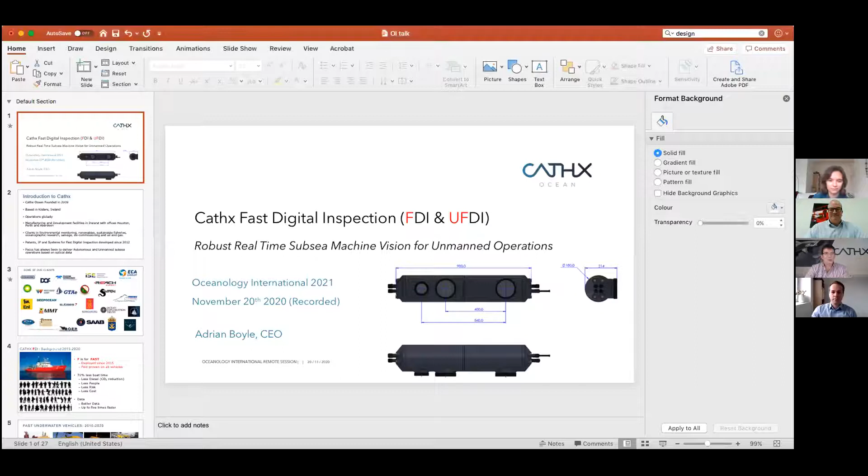Okay, so what I'm going to talk about today is robust real-time subsea machine vision, with a focus on unmanned operations. So I'm also going to start my stopwatch because I've nobody to shout at me.

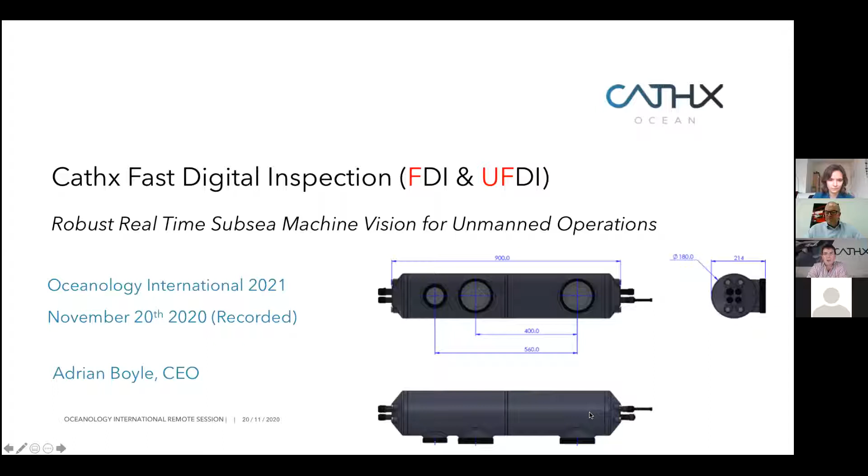In about 20 minutes, I'm hoping, if you're listening to this, that you have a better sense of what Cathx have done in the last 4 years, but more importantly, what we're working on today, in part due to COVID, but also in response to climate change, and what we're planning to release in 2021, particularly for the purpose of deploying what we call fast digital inspection, as I'll refer to what Cathx imaging systems do. I'll explain that, and I'll also explain what we're calling unmanned fast digital inspection, which is the transfer of that technology into the unmanned scenario.

So very briefly, Cathx, we're based in Ireland. We started in 2009. Our operations are global, and essentially we work in Gulf of Mexico, Australia, Aberdeen, and pretty much anywhere there is AUVs or ROVs, we have systems deployed. Manufacturing and development is done in Ireland, and our markets range from oil and gas, defense, oceanographic, and if you go to our website, you'll see many of the different case studies where we cover things like sustainable fisheries, oceanographic research, and particularly impact assessment on the ocean environment.

So there's projects from the Alfred Wegener Institute, you can read a little bit about them. I'm going to focus today on pipelines and a little bit about structures at the end, just to give a sense of what it is that Cathx systems do in the unmanned environment.

If you want to do some reading, we filed a bunch of patents in 2012 around all of the technologies we described. They're in the public domain, and you can read them, but they're probably about 70 pages long. There's 6 of them, but they describe in quite a bit of detail what underlies what I'm talking about today.

Our focus since 2012 - if you read those patents, you'll also realize the language we used then isn't the same language used today. There's different names for things. We've evolved technology, we've evolved the language, but it's in pretty basic terms in terms of augmentation, composite images, 3D models, and point cloud data sets.

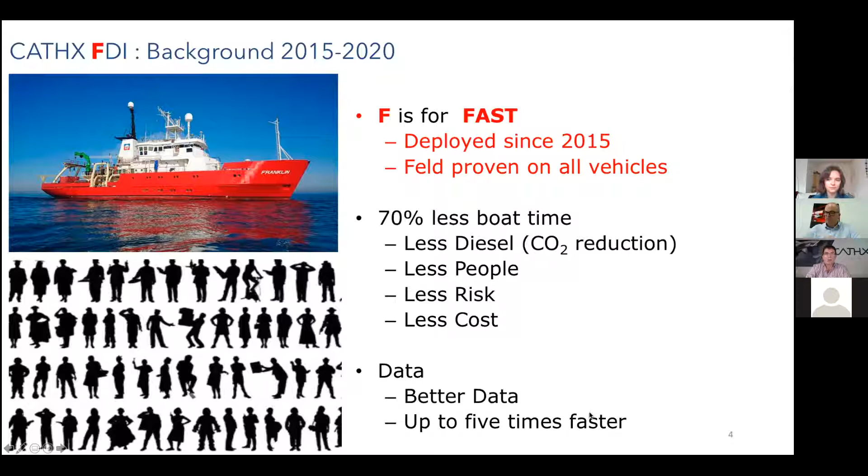Hopefully by the time I've explained what we mean by unmanned FDI, I'll give you a better sense of how we do things and why. Fast digital inspection on its own typically reduces boat time by 70%, between 50% and 70% is typical, and for pipelines it's probably closer to 70%. That means less people on the boat, less people offshore, and much less cost. But from a data point of view, you've now got less time on the boat to process the data, and I'll address that as we go through this presentation.

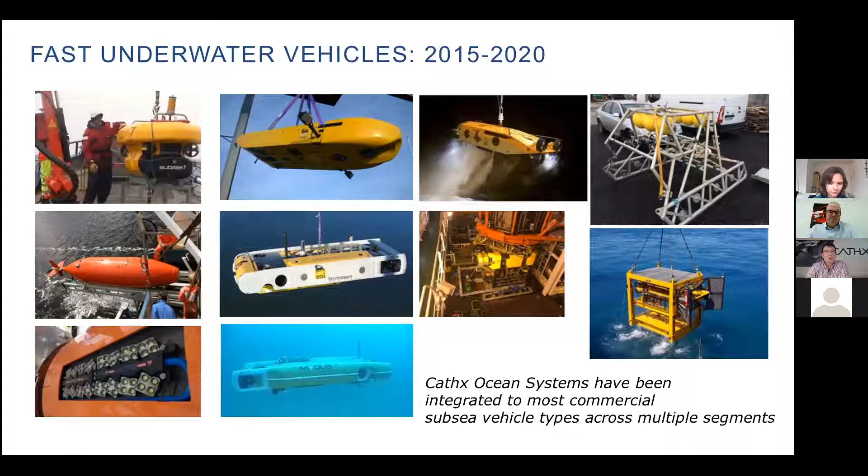These are some of the vehicles on which our systems are integrated, ranging from autonomous vehicles on the left to Sabertooth type vehicles belonging to ENI and Modus. We have a lot of systems on work-class ROVs, fast ROVs like the MMT and Deep Ocean, and on the far right, towed vehicles typically used in fisheries for shrimp counting and sustainable fisheries, counting shrimp and queen scallop nests in the seabed. We've done quite a bit of work with the Fisheries Board in Ireland and Northern Ireland on those areas. But all in all, the idea is to reduce boat time, diesel consumption, and cost.

One small technical detail: when we record data, we timestamp it very precisely. When we take an image, we do so in 1 millisecond, and we timestamp it at the time of acquisition. If you do the maths, operating at 30 images per second means there's 30 milliseconds during which the lights are on. For the other time, we turn on a laser and acquire 3-dimensional laser data. That timestamping and synchronization is critical to unmanned operation, and I'll explain that as we go through the presentation.

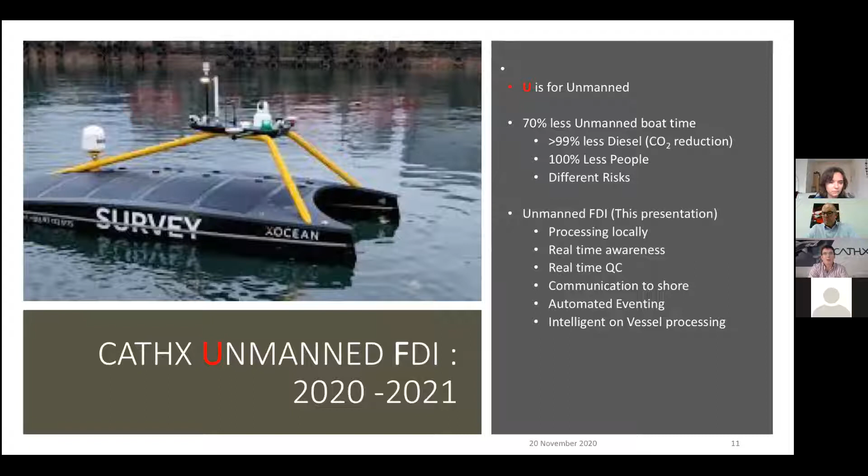So before I go into the workflow, this is a system that we are currently testing. It's planned for release in January. This is essentially very similar to our existing systems, but what we've done is we've put all of the subcomponents into one housing. So all of the cablings, the laser, the dual sensor, all go into a single housing, and they're all synchronized all in one box.

And this is, to Al's point at the beginning of the conversation, we had to respond to the market. We had guys offshore in Australia ready to go out on St. Patrick's morning, and the insurers stopped the job because if somebody had an accident, they couldn't be sure that the hospitals would take them due to COVID. And what we realized that morning was, look, we need to accelerate this development and be able to send systems offshore without Cathx personnel with them. They need to be deployed, easily integrated and operated remotely without personnel on the boat.

So for Cathx, we're putting this out early next year with the objective of using it on current operations for structural inspection, but also for pipeline inspection and many other applications. So there's a number of configurations to it. The specifications you can see, it's about 27 kilos in weight.

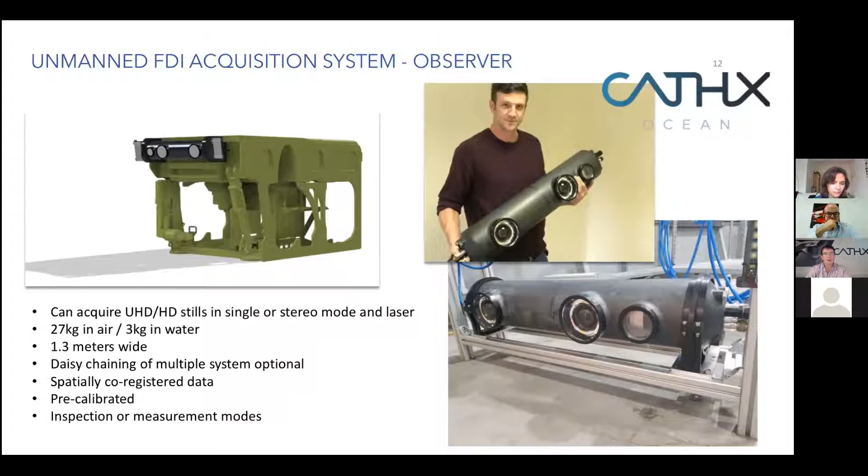To give an idea of the size of it, on a Seaeye Leopard ROV, it fits on the front of it for forward-looking inspections, and then we have a downward-facing version that sits comfortably underneath it. There's two cables that connect onto it. It's plug and play, and to be honest, probably in the first quarter we have a little bit of hand-holding.

But I think after that we should be ready to deploy it without much more than that, with just remote support. On a work class ROV like the Schilling, we have what's the equivalent of our Pathfinder, where we have a port and starboard unit, and we can also mount a forward system. And these can all be daisy chained so that they're all triggered and synchronized. So essentially, multiple cameras, lasers, all timestamped and synchronized together so that we have an ROV. And typically, these work class ROVs can go up to 2 knots in 1,000 meters of water in the North Sea, and then on the faster vehicles, they can go up to 4 knots or on the AUVs.

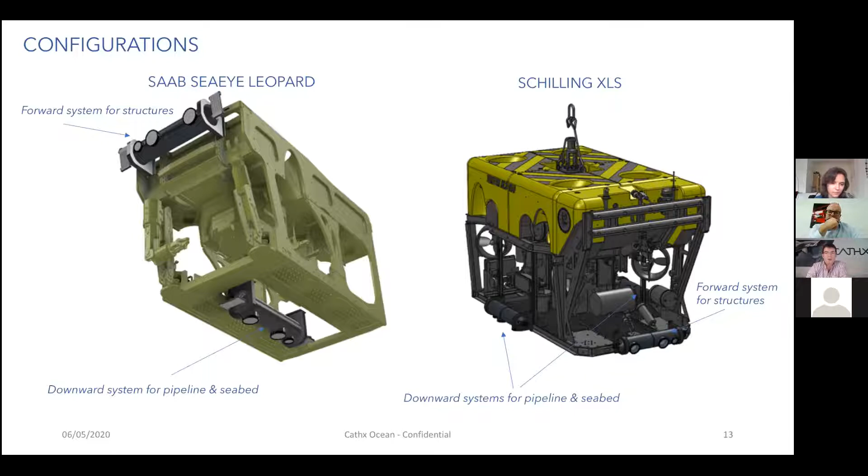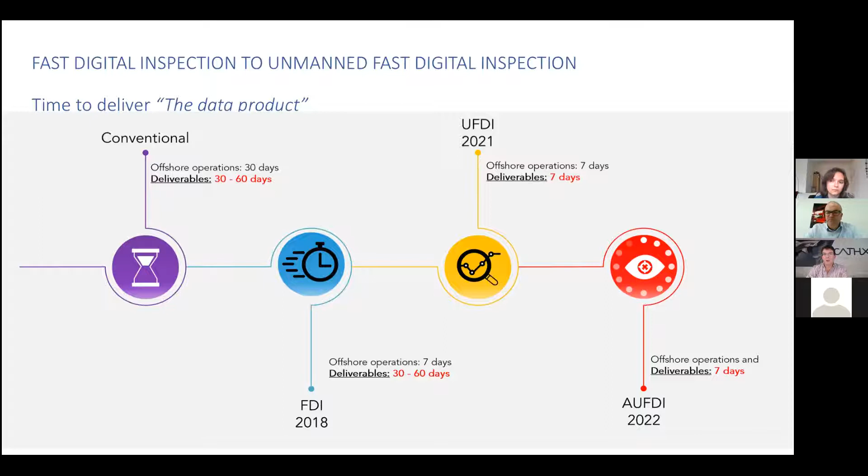But in principle, standing on its own today, if we were doing this for a current vessel operation and developing for that alone, it is quite feasible that we can perform automated eventing and deliverable generation during the acquisition time on the USV.

Or even on the AUV for that matter. So to try and explain that in a bit more detail, there's 4 elements to it. The first element is real-time processing. We want to process data real-time as it is acquired.

The second element is inline processing. The difference between inline and real-time: keep in mind FDI is 4 times faster than conventional survey, so we're already working in a compressed time frame. For an hour of conventional survey, you've got 15 minutes, meaning the data rate is 4 times faster. So real-time processing applications are pilot assistance and pipeline tracking.

We compress the images so that we can transmit them to shore, and then we do heartbeat monitoring. Essentially, we monitor the progress of the survey.

For the inline element, the automated eventing part, it's inline because it's not on the frame rate of 1/60th. Our laser can operate at 30 lines per second or 60 lines per second. Real-time refers to 1/30th of a second. When I talk about inline, I mean we might take multiple lines of laser, look at the stats on those, and accumulate that data, so it's probably within a second of acquisition.

So the inline eventing is one of the major developments we've been undertaking, and with that we can tag those events. What that lets us do is, once we've got our real-time processing for situational awareness and our inline processing, we can then look at the priority processing of that data and generate deliverables while the USV is offshore.

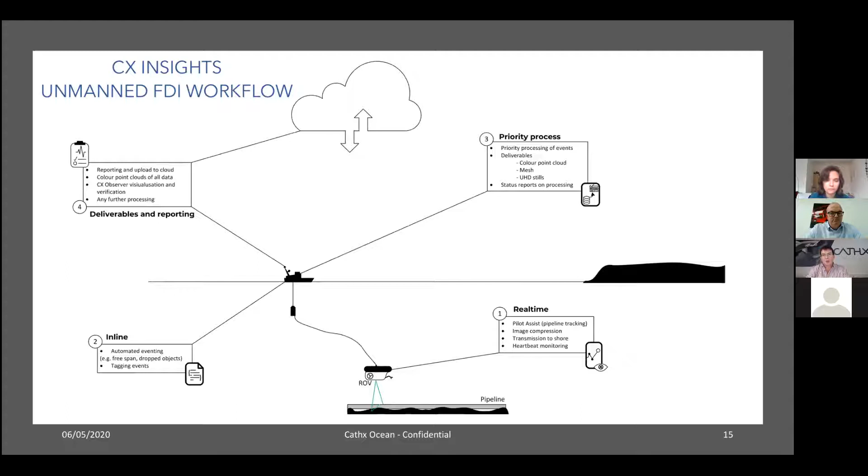And that leaves us with the very last piece, which is the deliverables and reporting. As soon as the USV arrives to port, the objective is that all of that data gets uploaded in an Azure box to the cloud so you can start to do inspection. At the very end of the presentation, I'll give you a snapshot of what that looks like for structural inspection.

So very briefly, I won't go into a lot of technical detail, but to explain the word machine vision, which I used in the presentation title, for unmanned fast digital inspection: if we look at a single laser line in cross section, in camera space, not even real world space, what it gives us is essentially a mathematical map, dimensionally accurate, of the pipeline or structure that's being flown over. In other words, it's a height profile, accurate to the millimeter level.

So what we've got in this case is from our Pathfinder system, where we can extract from this single line of laser data the lowest point on the seabed. We can extract the top of the pipe, the edges of the pipe, and the seabed. That lets us extract information around the pipe and the seam.

We can extract it for single laser lines or multiple laser lines, and I'll talk more about that. In effect, what differentiates machine vision from machine learning is we're using a physical measurement acquired in real time to draw a conclusion on what is in the scene. We're not using algorithms, feature matching, and blob detection. We're actually taking live laser data, extracting the information in the time period of the next laser line, accumulating that data, and using it to extract information on the scene.

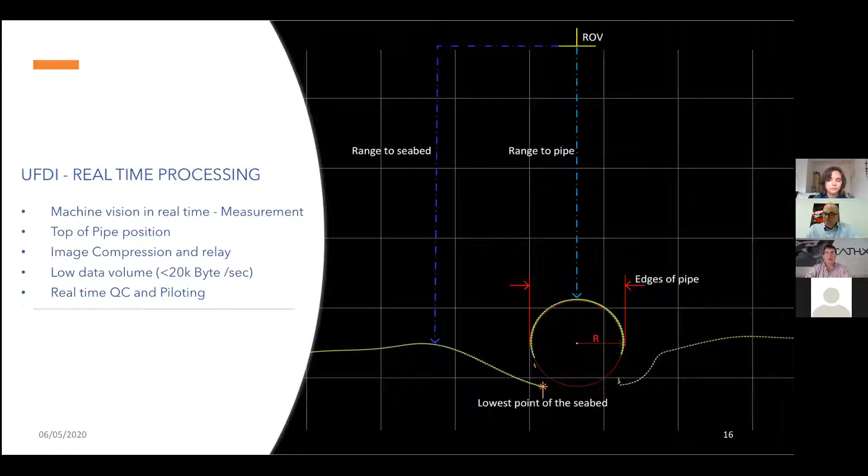So the next iteration, thinking about automation, is to actually close the loop. With a customer in Italy, we shipped what we call a pipe tracker, a real-time feed into the underwater vehicle so it can maintain its trajectory on the pipeline. This matters longer term because if there's a loss of communication between the underwater vehicle and shore, there's the capacity to build automation into the vehicle with this data set.

This is what it looks like - this was an early development done about two years ago, but it gives a picture of it. On the right-hand side we have the pipe, the laser data in camera coordinates. On the left, we have the corresponding image as we fly it. The data on the right essentially gives a feed showing we're locked onto the pipe. The crosshair in the center of the screen is the ROV position. So as the ROV travels the pipeline, we're able to see and visualize, in real time and in camera coordinates, both the images and the features.

Where this gets interesting is if you look at the finer detail of what's happening in these lines - you can see the little dots and blobs, the red on the left. Where there's a feature or physical structure in the scene, the laser picks it up and we can detect that too. In this case we're trying to track the top of the pipe, extracting the apex and the sides of the pipe data. You can see where it stops, where there's a tear in the field joint wrapper and a rise - this gives us real-time dimensional data.

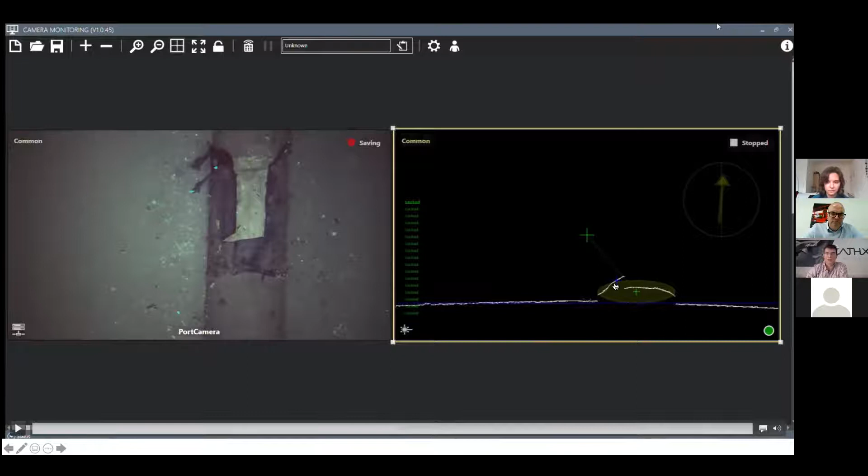That's one of the aspects - this happens in the FPGA, in the sensor, so we can feed that out as we collect it.

If we take that a step further, we can do similar processing with free spans. We have no requirement for nav processing, remember - we're literally looking at the structure of the measurement data as it feeds from the camera. This lets us do segmentation of the pipeline and the seabed, and allows us to take N-point measurements across the pipe. And remember, we've also got the corresponding images, so anywhere we detect a signal on the free span, we can acquire and separate those images.

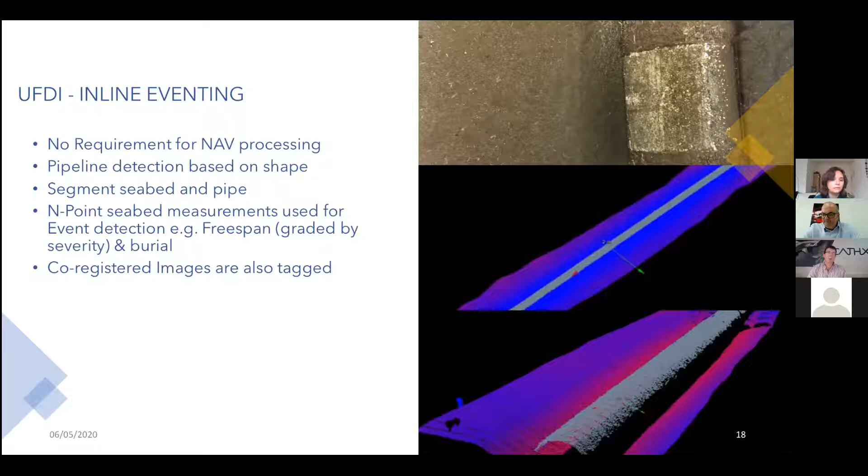Think about this in an unmanned environment - as soon as we detect these changes, we can start to sort and separate that data by tagging it and put that in for priority processing in the next stage. Likewise for rocks and objects, dropped objects, field joints, and anodes - there's a corresponding signature in the laser data that facilitates that.

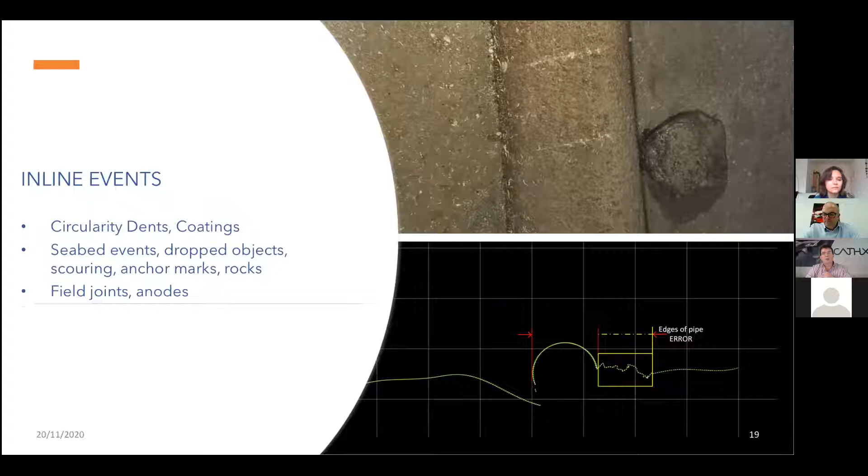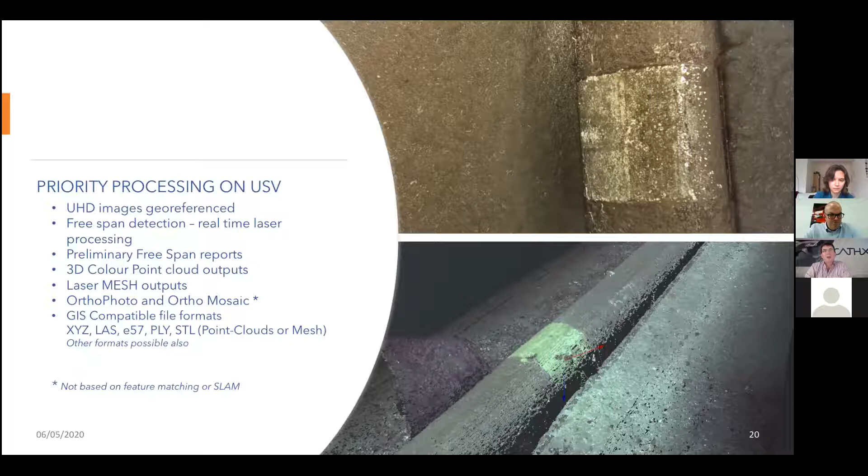Just conscious of time, I'll skip through some of this. Essentially, priority processing refers to: if we've gone out and collected these events, we then have the capacity to generate deliverables on those events, either in color point cloud, mesh, or orthomosaics. We've been doing this for a couple of years with existing data sets, and it comes down to the requirements of the integrity engineers. By and large, color point clouds seem particularly useful, especially for free spans, and the images then give verification and validation of what's seen in that data set.

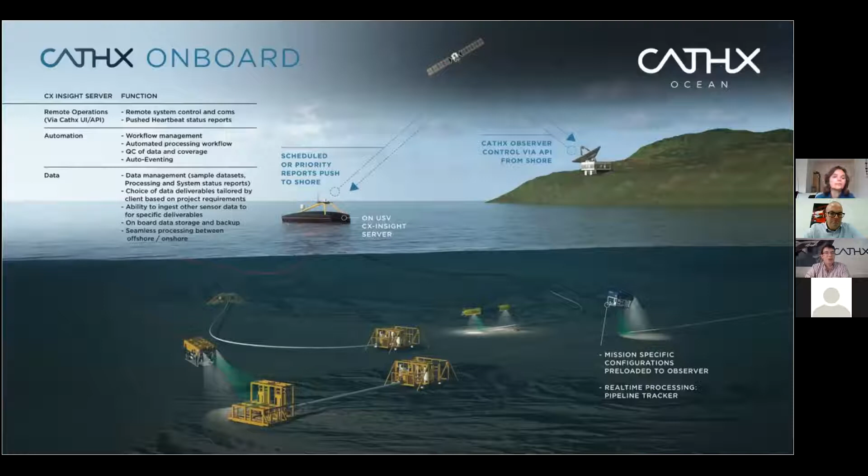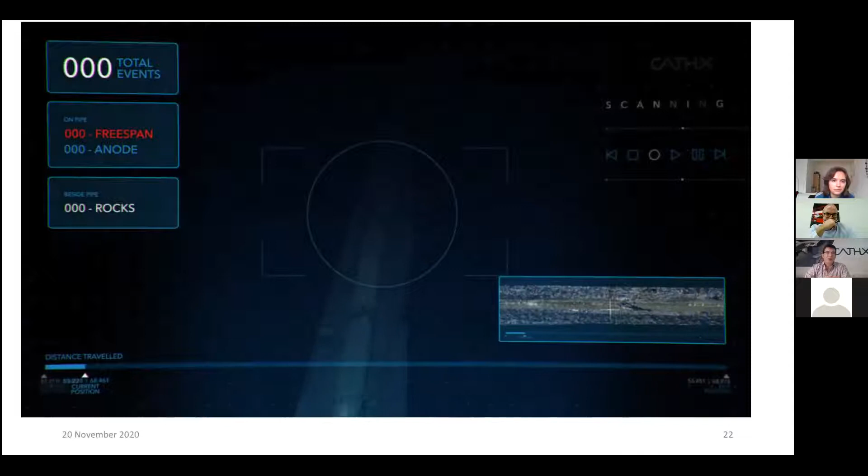This is a much fancier picture of one I've shown earlier, so I've covered most of the points in it. Where we're trying to get to is automation - the whole idea, from the point of view of using laser data to perform real-time eventing, is that where we want to go is fully autonomous, unmanned, fast digital inspection.

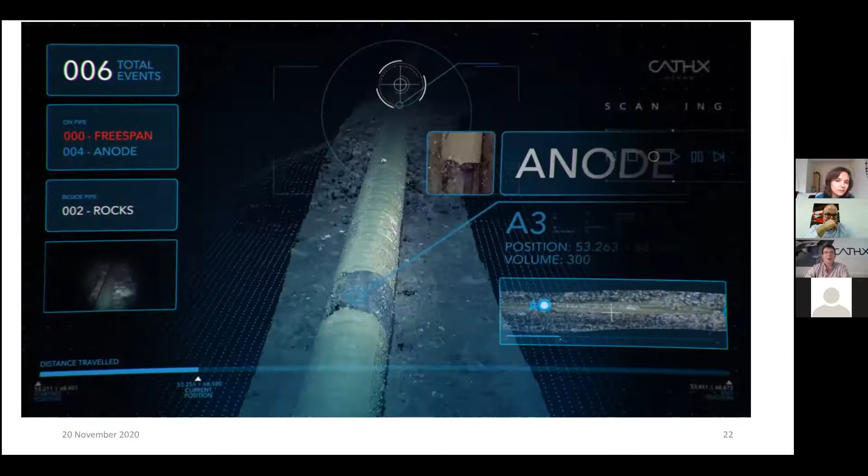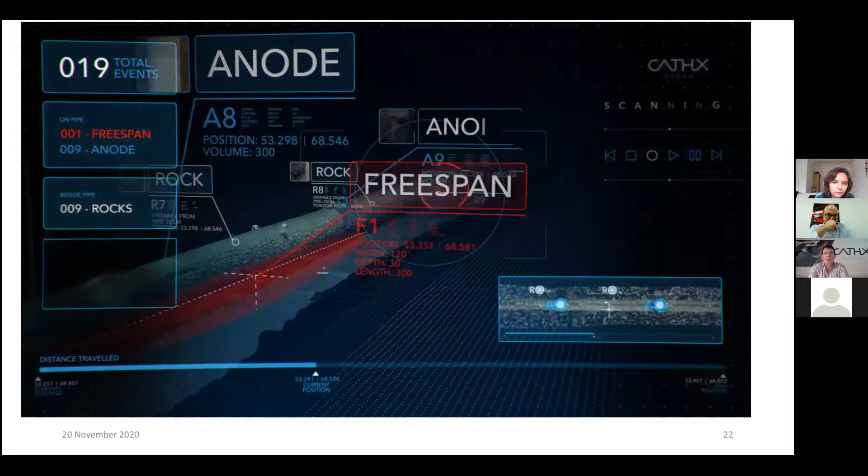So all of the elements that I've talked about are there in a way that with relatively low risk development over the next 12 months, our ambition is to be able to event, and it may not quite look like this, but to be able to pull these events from the data set as it is collected, to provide cloud access to that data through an inspection machine, and that inspection machine really looks like this.

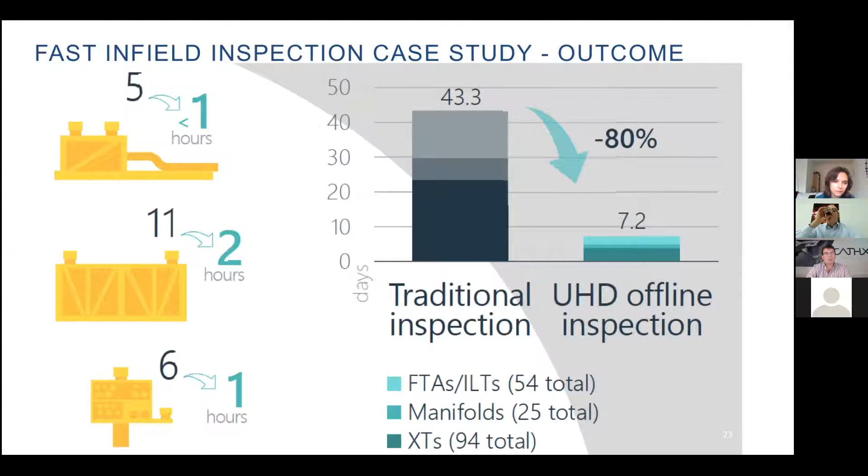Essentially it's what we call CX Observer. In this case, I'm going to talk about structures because if you look at work we've done with our clients in West Africa or in Australia, the whole idea is much like pipeline, we do the work in one fifth of the time. So we can reduce the time it takes for an inline T or a manifold considerably, typically up to 80%. We do that by essentially flying the structure from a distance of 2 to 3 meters, doing QC on the data as it's acquired, but particularly doing the inspection onshore, not offshore.

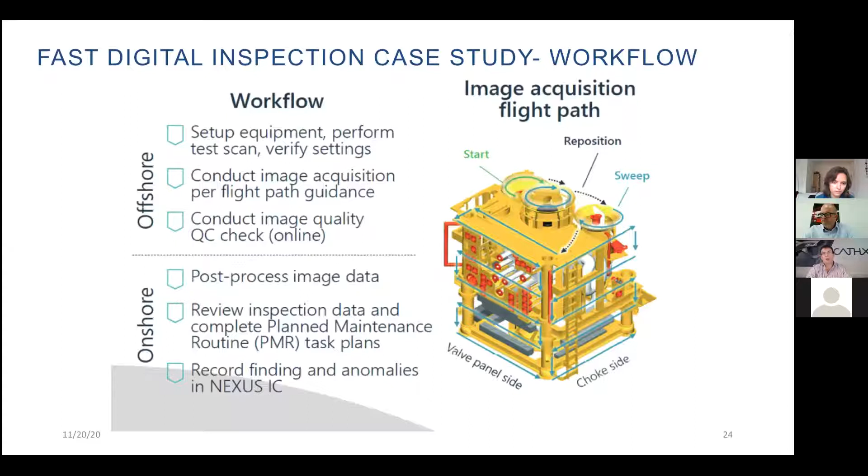So what we've built is what we call CX Observer. It's the manual inspection tool that allows the inspection engineers to review that data, tag that data, to mark particular events and features on the structure in 3D, to review the images in 2D, and then to store those data sets, and particularly to integrate them into Coabis and into Nexus. By the end of this year in December, we're doing it at the moment, we'll have a full Coabis integration.

And the whole idea is that this process, much like the pipeline, if you start off and think about the manual inspection workflow, which we have worked on so far, the next obvious iteration is in 2 years' time when our clients go out to do this inspection the next time, we actually have the data in the right format, in a way that people can interact with it instantaneously, and start to build automation into it in that way.

So there's two elements. There's the current way we do it. There's the longer term objective, which is to automate it through machine learning, machine vision. And for structures and pipelines and whatever it is we're looking at underwater, the whole idea is we have real-time data, we have QC, pilot awareness, and the same principles apply.

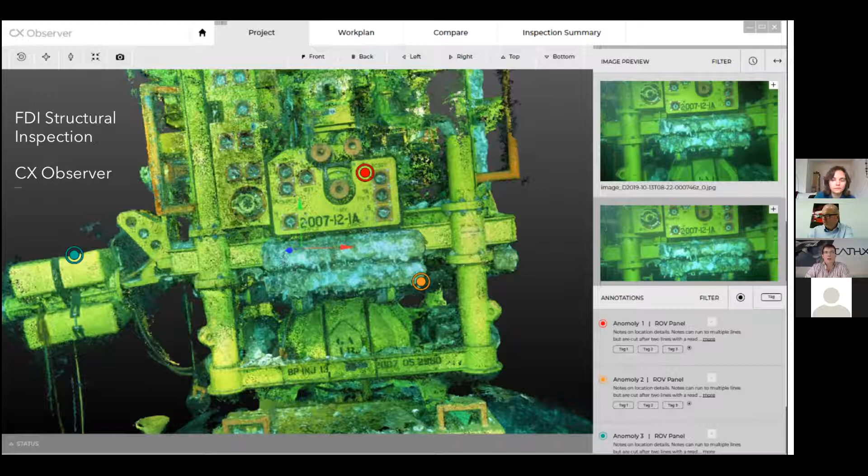But the whole idea is at the end of it, we have this data in a format that is standardized in the cloud so that inspection engineers and integrity engineers can start to use it for integrity management, which is really what we're all about. But from the unmanned fast digital inspection point of view, this approach essentially gives us data that improves and facilitates unmanned operations, both for pipeline and for structures.

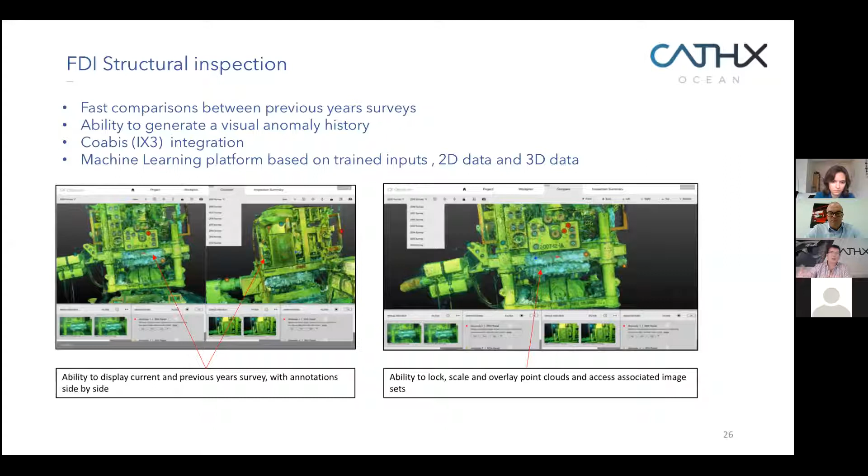And then year on year, this methodology allows us to do things like pull up the previous point cloud, the previous image, it gives us that interface to both manage the data and pull out the particular anomalies and track changes, and essentially forms the basis for our data analytics platform, which is effectively automatically pulling up specific defects on specific structures, but also comparing them across all structures.

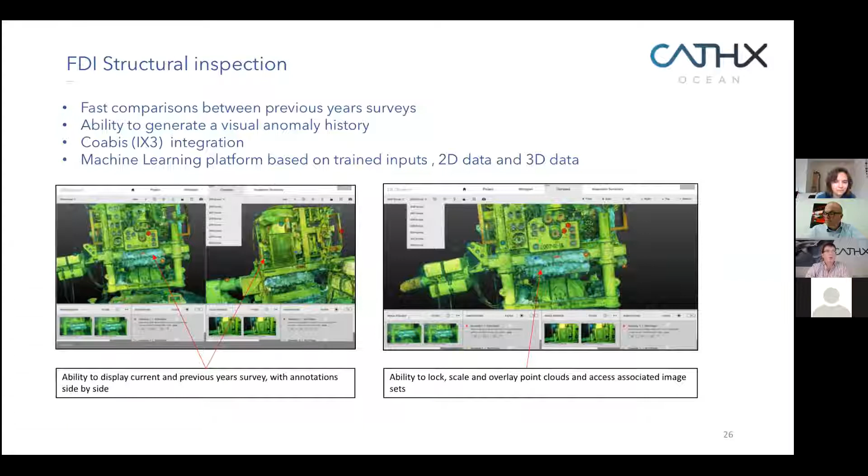This presentation isn't about machine learning, it's about unmanned FDI, so I'm not going to talk too much about that. So to conclude, hopefully not too late, our fast digital inspection data method was developed for automation. It wasn't developed for the manual workflows today. So our objective is to reduce that time, the time of processing and deliverables, or as our clients call it, the data product, to the same time as acquisition, but in parallel to reduce the time of acquisition, even in unmanned operations, to one quarter.

And to do that effectively, the workflow changes, the deliverables change, but we're working with our clients to define what are the deliverables required for, what's important to integrity management, and then what's important in terms of reducing costs. So from a Cathx point of view, we're doing this already for existing operations. We're accelerating it due to COVID, and over the next 4 to 5 months in particular, we expect to be performing unmanned operations using this capability.

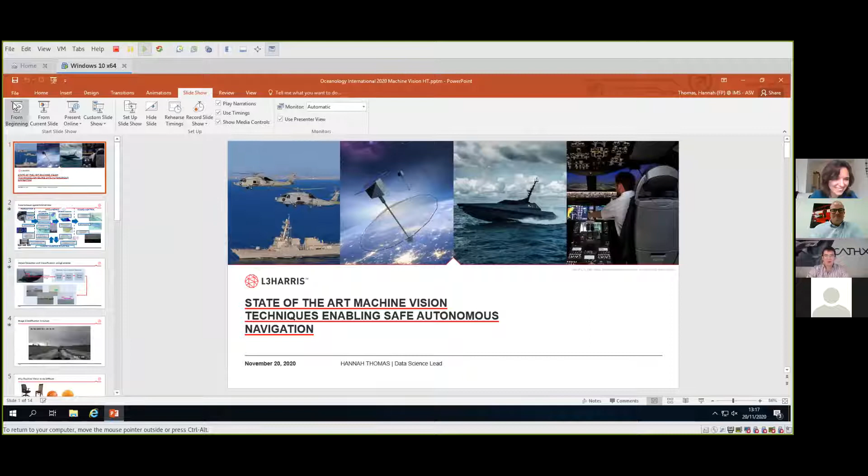So I'm very happy to be here today talking to you about the machine vision techniques that we have developed at L3Harris ASV to enable our safe autonomous navigation.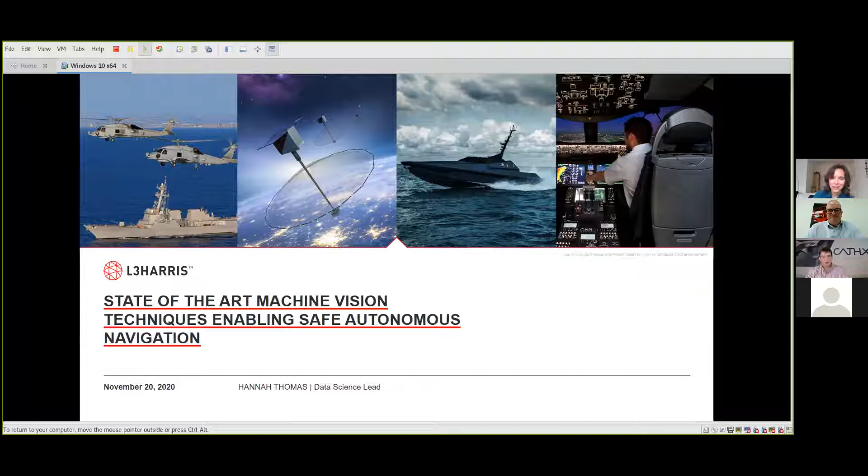So I'm going to start with an overview of our autonomy system, just to put things into perspective and explain what we use machine vision for and why it's so important for our autonomous navigation.

So we start with the perception of the system, where we take in raw data from our various sensors, cameras, radar, LiDAR, AIS, various charts and external data feeds.

And then that gets fed into the intelligence system. And the first thing the intelligence system has to do is make sense of this data to build up a big picture situational awareness of the environment around us.

So it'll take in all this data from different sensors, which have got different types of information and different amounts of noise and things that need filtering through. And it will make sense of that, turn it into a situational awareness picture, and then it needs to turn that into some kind of decision.

So we need to take this information, evaluate our options, and decide how we're going to react to that. And then having made the decision, we then need to carry it out. So we'll send instructions to the controls that say turn left to avoid this collision, or whatever the action is.

Now, as the AI of the system develops, we're finding that the human-machine relationship is changing. So we have this human-machine feedback interface. But as I say, as the intelligence increases in the machine, we're finding that the form of that relationship is evolving, and it will constantly evolve as we develop.

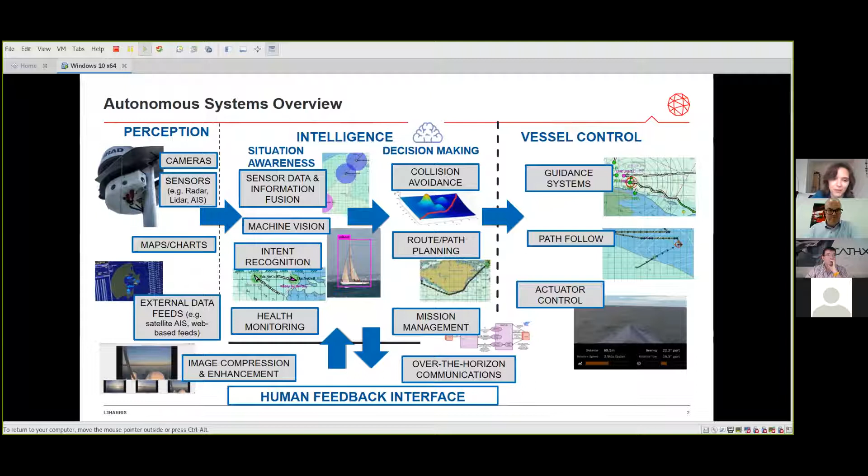So where the machine vision comes in is a crucial component of the situational awareness of the system. So one of the things we do with machine vision is object detection and classification.

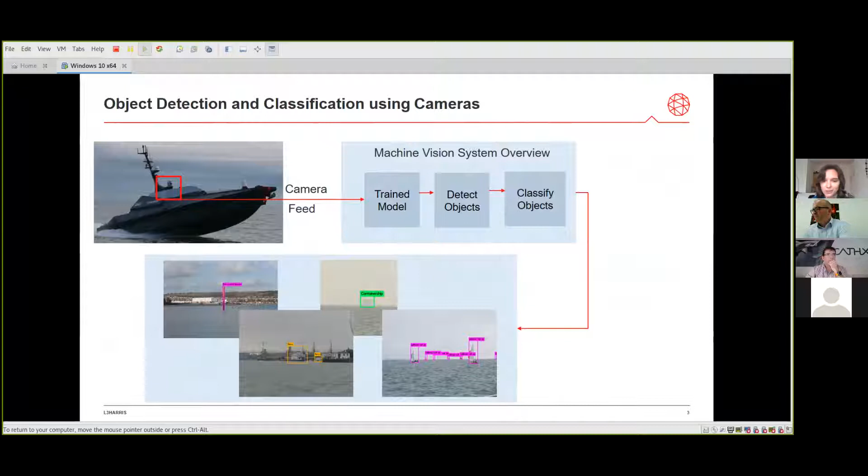So we will train algorithms that can look at data frames and scan through them and identify where there are objects of interest for us. So here's an example of that working in action.

So what we've got here is our autonomous vessel transiting out through the Solent. And on the right-hand side, you can see there are some sailing boats parked up. And our autonomy algorithm is detecting that we've got those sailing boats there and alerting us to the fact that they're there, and we want to avoid them to avoid a collision.

Now, we're constantly going out in different environmental conditions to test our algorithms in different scenarios. And in this particular case, we went out on a day where it was all a bit horrible and overcast to test that the algorithm could still work in these grey and kind of muggy conditions.

Now, in principle, that might sound like a fairly simple task to do, but it's actually, to get a computer to do it, it's actually really difficult. And the reason is because it's really difficult for us as humans to really define what the problem is that we're actually trying to solve.

So for example, when we're looking at objects visually, the same object might have a variety of different visual representations. So for example, if I'm looking at a chair, I could describe a beanbag as a chair, but I could also describe an office chair as a chair, or a dining room chair as a chair. So all of these things look very, very different visually, and describing what that looks like, just describing how to identify that just from visual representation alone is a really difficult problem.

So this is where machine learning comes into play. Because it's a hard problem for us to define, we can flip the problem on its head and get machine learning to learn directly from the data. Rather than us having to define a mathematical function, we get the machine to work it out for itself. But to do this, you need enough data to comprehensively teach your algorithm the problem you're trying to solve. For example, in the chair example, if you want it to learn what different types of chairs look like, you have to have the variety of data to cover all the different scenarios of what a chair can look like.

Another problem we have is that because the function is learnt by an algorithm, it's not something we've worked out for ourselves. Because it's a vastly complex algorithm, the kind of features it picks out from the image and groups together could be really complicated, and it could even think up things we would never have thought of ourselves. That can make it really hard for us to know what it's actually learnt beneath the bonnet, and to understand that the resulting algorithm has the discerning capability to really tell you what a chair is, and define things with certainty.

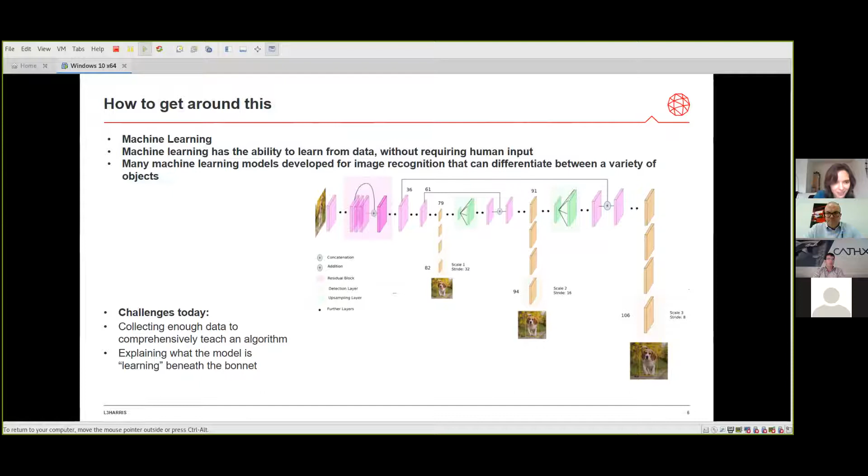So let's talk about the process for developing a machine learning model to illuminate this a bit more. I mentioned how data is really important. A lot of people are probably aware that typically for machine learning problems you need lots of data, but really the key is having the variety of data to really teach the algorithm what you want it to learn, and make sure it doesn't overfit to a particular scenario if you don't give it enough data.

So we are always going out collecting data in the real world whenever we get the opportunity, to cover the variety of different environmental conditions and different parts of the world where things look different - the sea looks a different color - and all sorts of different factors that might potentially be confusing for an algorithm.

But also, to give us an extra bit of control over what we're feeding into our algorithms, we make use of simulators. Once we've got all this data, to make it useful for the algorithms we have to tag them as well. With simulated data we can automate this process because we're controlling what's being generated. With real-world data we have to go through and do the labeling ourselves.

So we've developed some data labeling tools to help us do the job. We have a semi-automated labeling process where an automated process runs through and does a first pass, and then we go through and refine manually.

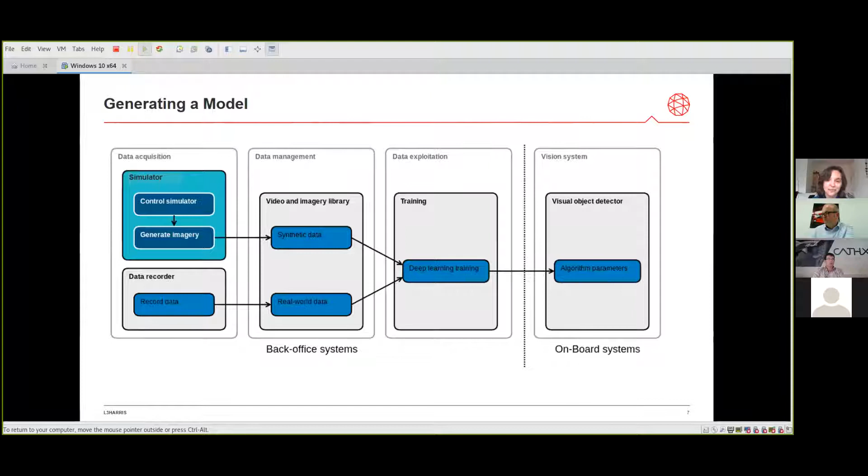Once you've got your data ready to be fed into an algorithm, and maybe you've done some sampling, made sure you've got a good variety and spread of examples to give your algorithm the best chance of learning what you need it to learn, we then feed it into our algorithms and they'll do a bunch of training. Because it's quite a complex problem and function they're trying to learn, this can take a long time. As a result, you get your visual object detection out, which we can then run on our boats and feed into our collision avoidance algorithms.

So data collection - I mentioned how this was really important, and capturing the variety is really important. We've been collecting data since 2006, and we're going out in different conditions all the time. Whenever we get an opportunity, particularly if it's a new location we haven't visited before, we're always going out and collecting as much data as we possibly can.

We'll use different cameras, different sensors, and try to get pictures of objects from different angles. We'll go out in different weather conditions and do all sorts of things to get as much variety as possible in our data set. We're also interested in anything that makes the visual scene look different - capturing pictures with water on the lens, going out at nighttime to capture infrared images, anything that makes it look different. That's all interesting to us because it's the variety that we need.

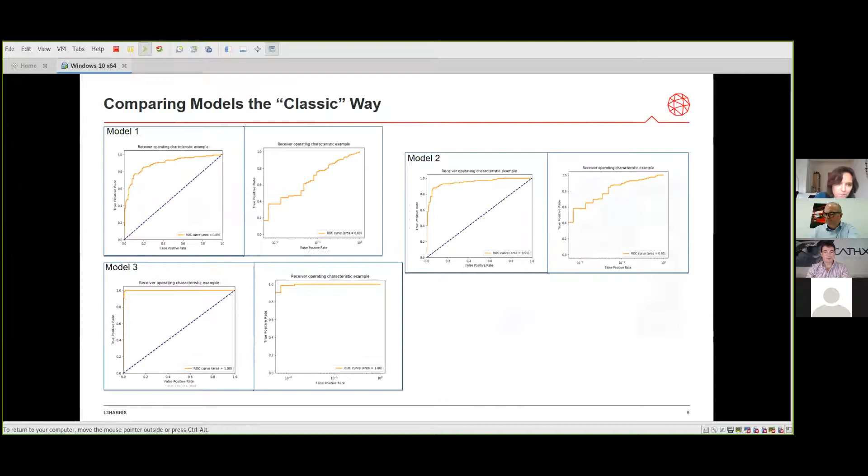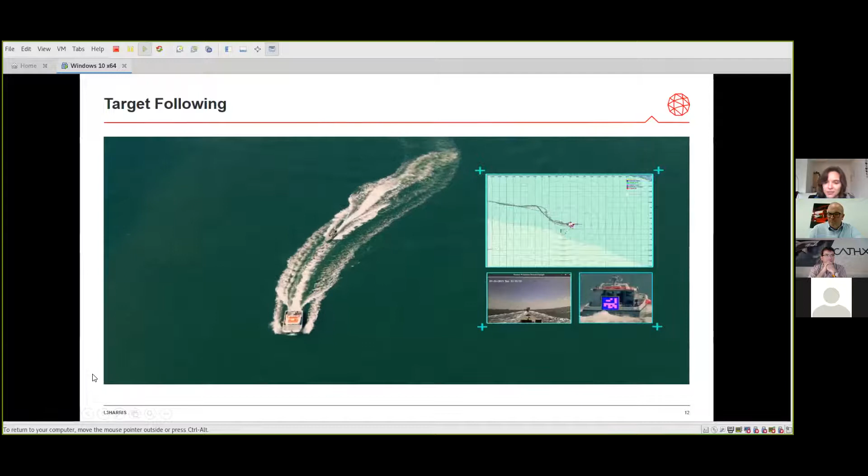How it works: in this example we stuck a QR code to the back of the support vessel in front, and our autonomous vessel behind uses the positioning of the QR code to align itself and follow in the wake of the vessel in front. This is an example of us using machine vision to position ourselves very precisely in relation to another object.

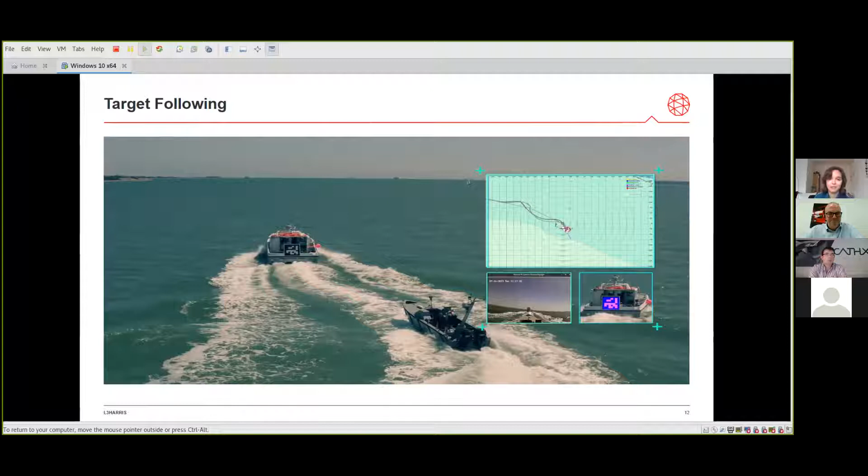Hannah, you've got about 5 minutes if that helps. That's great, I'm on my final slide now, actually.

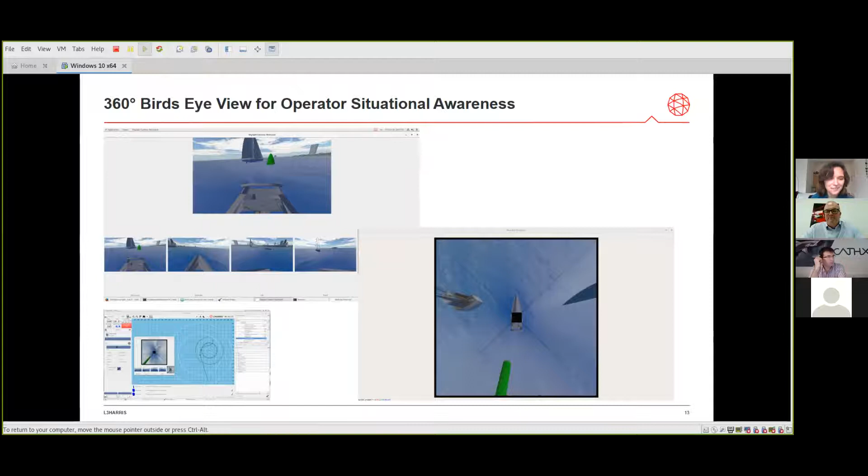So that is a quick summary of the various types of machine vision work we have going on at ASV, and how we use it for our autonomous missions.

Brilliant, thank you very much, Hannah. I have a few questions, I'm sure the other panel members will too.

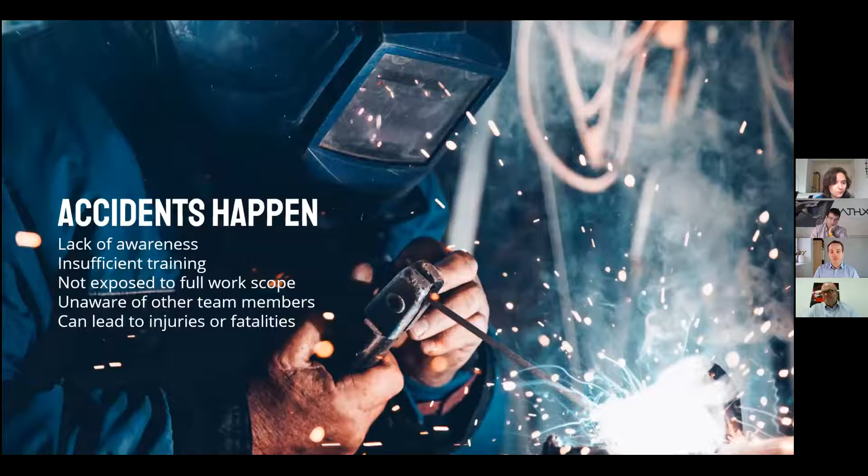There are some known pitfalls within the area that we've been operational in, and that is the incidents and accidents when there's a lack of awareness, insufficient training, not being exposed to the full work scope, not being aware of other team members. All that can lead to production stops, operation stops, damaged equipment, and missed deadlines. That's some of the potential outcomes here.

So traditionally, there's a number of tools that we have been applying for the industry in order to help address those problems and avoid them. Virtual reality and augmented reality are just two of these tools.

And of course, there's a number of different control options that one can use when controlling a certain machine for operation, whether that's hand recognition, virtual reality gloves, controllers, or the traditional operator chairs. There's a lot of flexibility in how one can control an operation, spanning from manual training to full actual operational control of the machine. All these different options exist, fully dependent on the project budget and the amount of flexibility and interactivity needed in a certain operation.

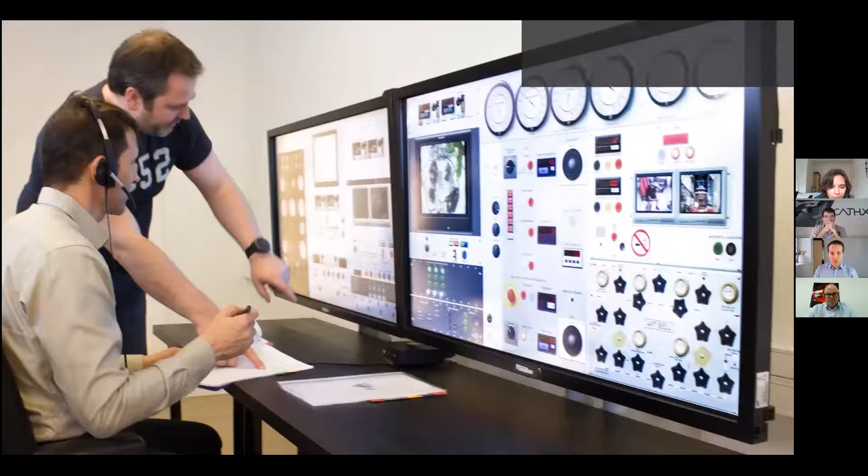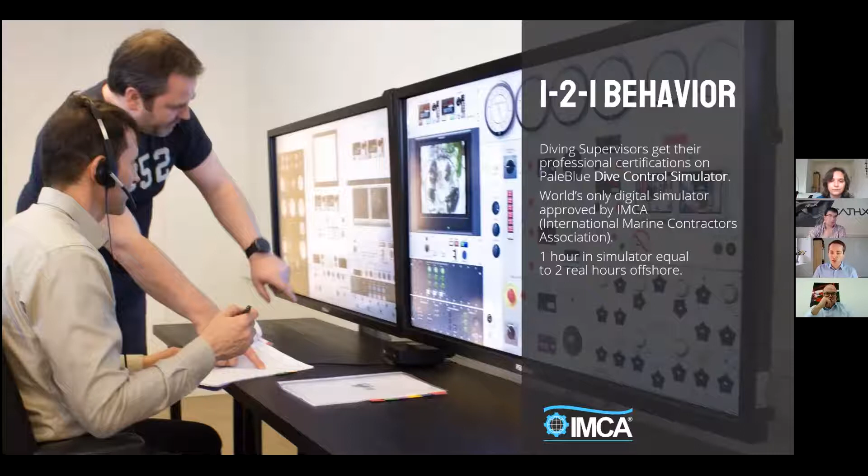It's also important that when we're training the humans or the machines, we're trying to achieve one-to-one behavior in the simulated medium. We want to reproduce the processes as they occur so that the resulting training systems can also be quality controlled and verified, such as, for example, the International Marine Contractors Association approving some of our digital systems for training of personnel, due to the conditions, pressures, gas mixes, and working conditions being reproduced very close to reality in a digital simulator.

We want to immerse the humans, we want to immerse the machines. With that, we want to give users freedom of movement in different synthetic environments, whether those are on land or underwater, subsea. We've done a number of systems for commercial diving, and I'm sure there's a clip coming on that as well. So in this, we need to balance what kind of tool set we're able to use, and typically we aim to look at off-the-shelf available systems, such as this.

This is a standard issue VR headset, typically available in Best Buy or similar electronics stores, where we have to construct additional elements of the picture not really available in the sensors. The only sensors available are the headset and the hand controllers, meaning the system doesn't really see or detect anything happening below the waist. Those are the parts we reconstruct using a prediction algorithm with inverse kinematics, trying to position the legs as they can be in this specific moment of time.

This adds to the immersiveness of humans, but also to the immersiveness of machines, because machines then scan the surrounding area. If it's ROVs and humans working together, we want to produce an artificial point cloud, also for the virtual humans. So this is one example where we want the visuals to correspond with reality, whether the visual sensors or LiDAR sensors would detect a realistically looking environment.

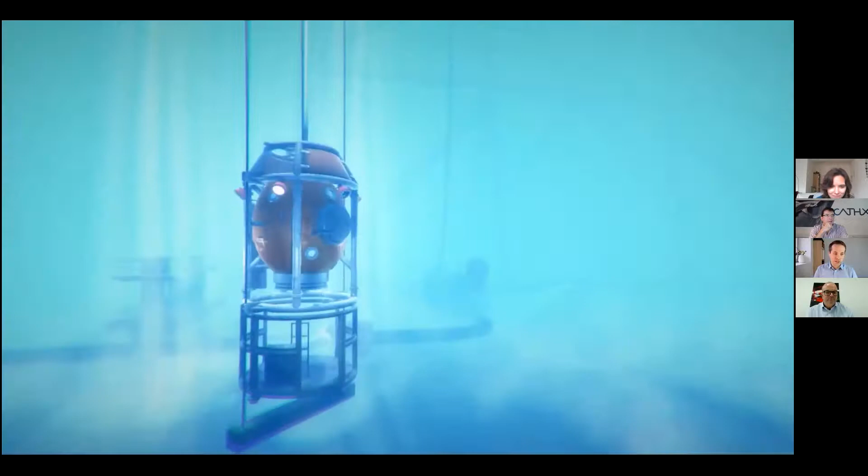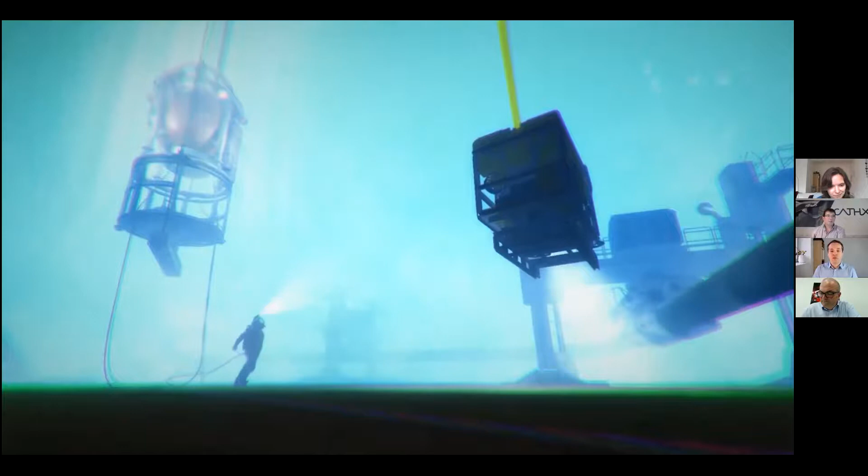Here's another example: making synthetic environments for underwater operators. This is a system for training virtual reality divers, where commercial divers operate. They go through the diving bell setup and lockout, open the hatch, and go out to the seabed where they interact with others and with the ROV pilots. This is a simulated environment made to be rather realistic, with the ability to change and vary the amount of visibility, say how many meters of visibility one would get in a certain scene.

So this is where human operators can be immersed in that medium, where they can rehearse different scenarios, and you see the ROVs partaking as well. This is one of the interesting examples where it's possible to run through an operation. We all know machines have simulation capabilities - all the PLCs, the programmable logic controllers, have a simulation mode that allows us to test them out in different scenarios and conditions and see how the autonomous logic will work.

But the truth is, most operations also involve humans in the same scene. So our focus has been on combining machines and humans in the same virtual scenes for those different operations, making sure we can really operate the equipment by machines and by humans, with the checklists and procedures, going through normal operations as well as emergency operations.

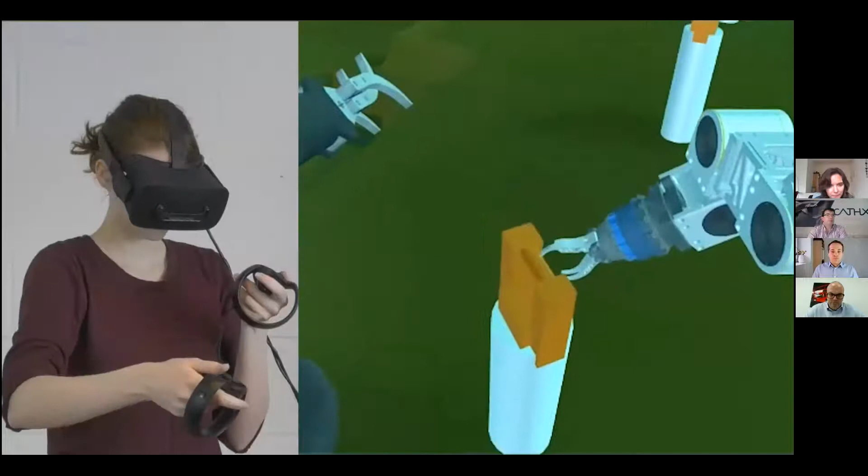Operating the machines, in this case the ROVs, we're looking into modern ways of how interactivity can be done for manual control and autonomous control. We're mapping a standard issue VR headset with VR controllers to the ROV's manipulators, in this case a 7-function and a 5-function. We're solving essentially an inverse kinematic problem, positioning the manipulators the way the human hands are positioned, following up with all the joints found in an ROV arm.

So this is yet another way this technology can be plugged in for prototyping, not just training but also operations. In the studies we've done, we see this can be pretty understandable and straightforward, even though you have to learn the original manipulators quite a bit before you can operate them - the master controller arm for the 7-function, the joystick for the 5-function. Going into this method of operation, it becomes much shorter time for learning how to do certain stabbing and underwater manipulator related operations.

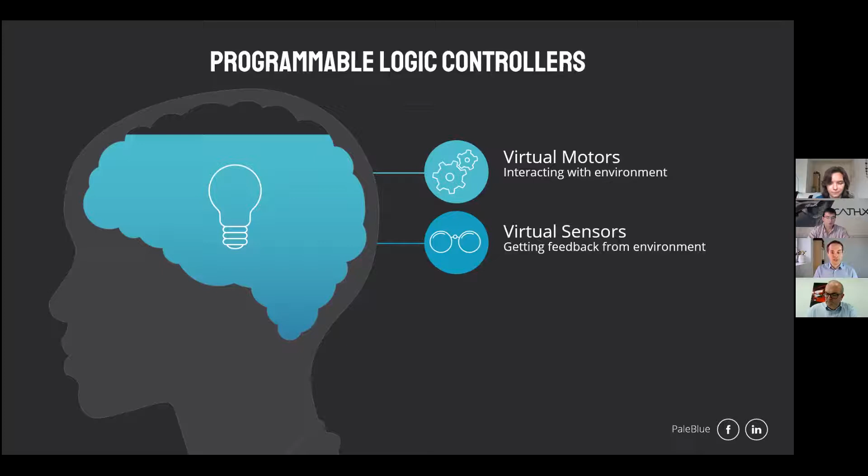So combining this virtual sensor and virtual motor and a PLC, we produce a digital twin for real equipment, because there's a PLC running the brain, but we have to create a virtual, if I may, physical copy of the machine, having the geometry, the thrusters, the manipulator arms, and then we put that virtual copy, the digital twin, into the virtual environment. So this is where the PLC, the brain, is disconnected from any reality, and it drives the digital copy in a digital world, interacting with the other digital actors.

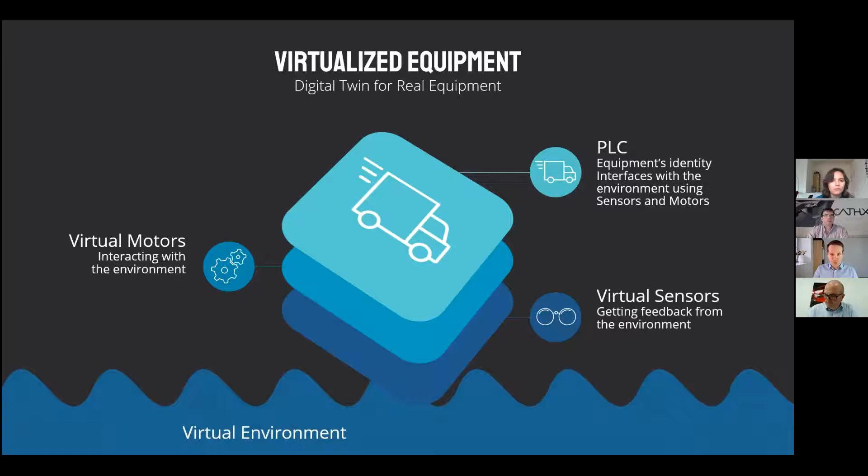Now, for the autonomy, we know, based on NASA's levels of autonomy for automation systems, one can list 8 levels of autonomy. If we start at level 1, this is where the human alone can execute the decision. At level 2, the human is the prime source of execution. And then as we move upwards, the amount of autonomy grows to when the system still allows the human to have a certain veto time before the execution.

Context-dependent, pre-programmed, or at level 6, the system allows for override after execution has taken place. Levels 7 and 8 are higher, with level 8 when there's no allowance for human interaction and the system performs fully autonomously. And then again, in different segments, there's a different level of adoption of how autonomous the operations are.

If you take the autopilot on jets and airplanes, they've obviously taken it rather far. And if you're thinking, say, today's drilling systems, they're still quite low. They're not really on the upper part of the spectrum.

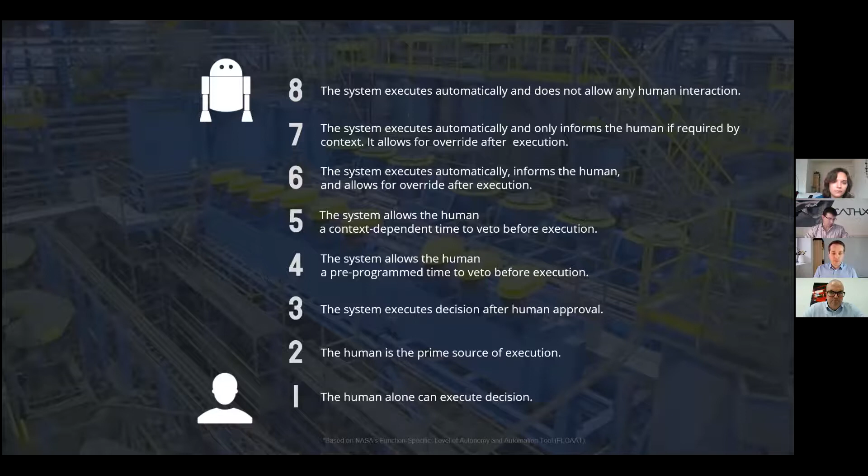So our task then is to enable the AI to use the simulators. We have to make a copy of the environment, because that's where the machine is going to be immersed. We have to copy the environment in ways that can be read by a machine. We have to copy perhaps the visuals. Sometimes we have to copy the thermal signatures of the environment. And if there's a laser scan, we have to make sure that our virtual world allows for a virtual laser scan that can be perceived by a machine.

Here we come to an interesting way of operation. We've been looking a lot at drilling operations, which comes down to these 4 steps when we have the real environment, but also the virtual environment. We've trained our machines so they know how to operate, but still, when operating in an unknown environment such as drilling, we never know how the drilling process will actually go, just because there's a lot of unknowns and unknown variables in the lithology, in how the drill string will go.

So we've come up with a set of steps that allows the machine to coexist in the real world and the virtual world. Perhaps this is best illustrated by this: AI can operate in 2 worlds at the same time. First, it has the digital twin of the environment, of the machinery, of the situation. Then in each specific frame, it can try a certain move in its prediction model. So let's say it can try a certain strategy for drilling with higher RPM, or it can try a certain rotation in the drilling.

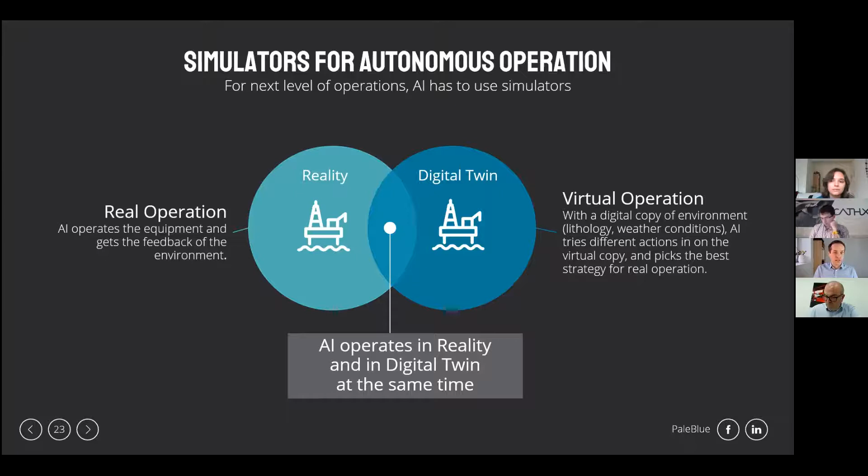Lessons learned: distributed collaboration really helps now in COVID times. I think it's becoming rather understood by many, where we can connect people and machines from different sites. People don't have to be in the same room anymore. We do a lot of distributed training, and a lot of operational checkups that are distributed and not bound to the same room anymore, just because we have these digital twins that allow us to do these digital operations.

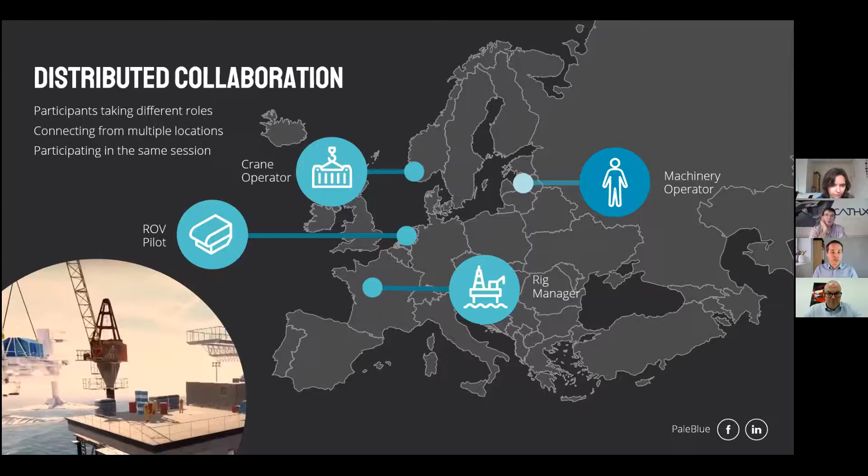There's a number of benefits using simulators. Training simulators for humans, that's a known thing. Training simulators for machines, maybe not so known as of today. And then again, operational simulators that allow the machine to perform better and make better decisions by having digital and physical models at the same time is something that we're just getting into.

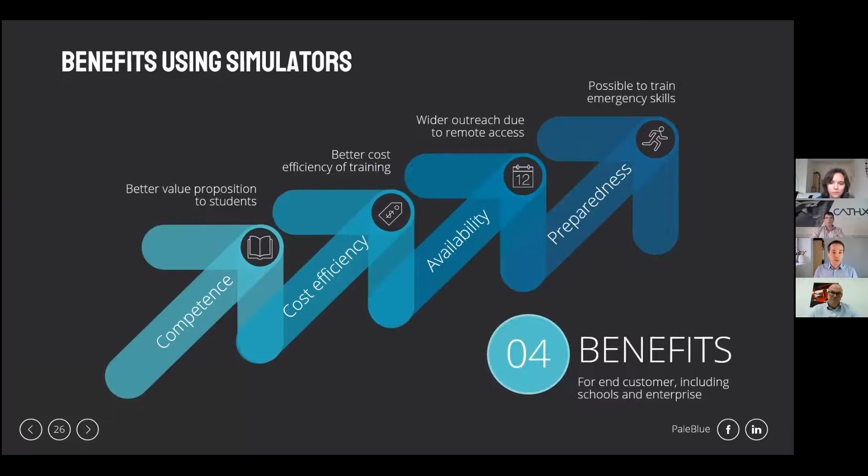It doesn't look like this will take away the need for real hands-on training, real hands-on operation on site, but this can be complementary to what is being done already, and simulators can make certain things easier and more effective.

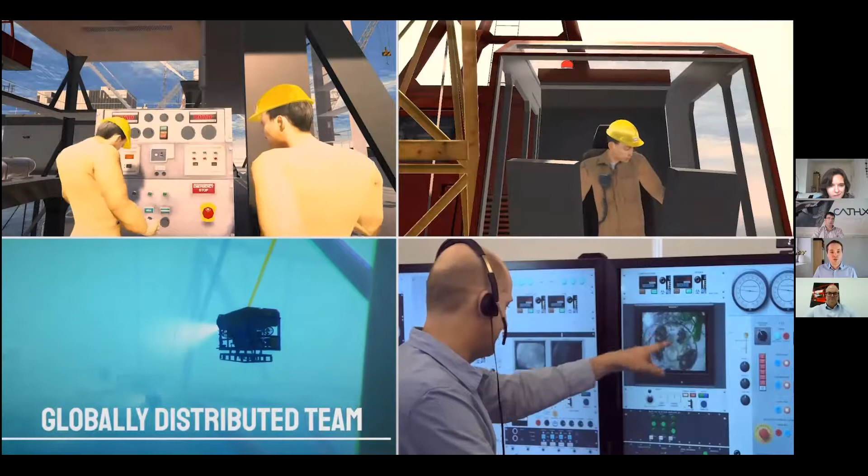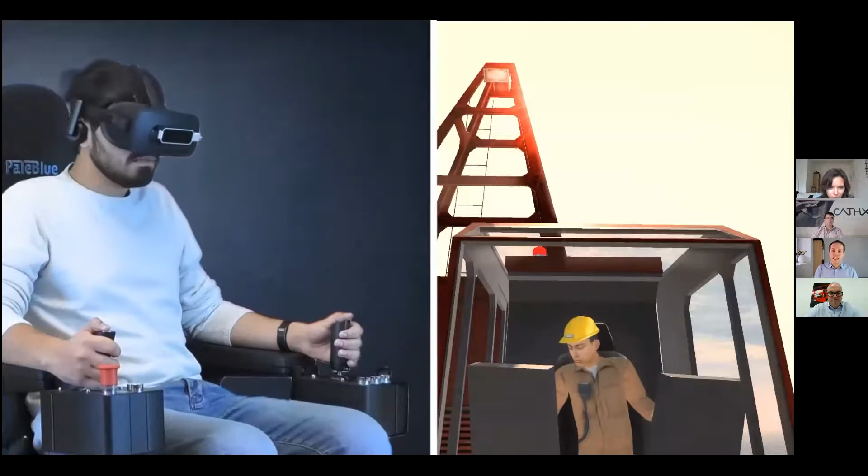So combining those things, here's a small demonstration of how one offshore operation, taking a module from the oil rig onto the seabed, can be done in a constellation of humans and machines working together. We're getting 10, 15, or maybe 20 participants at the same time working in this visual replica, in this virtual world, so that they can all cooperate and conduct a certain operation in all the different roles that they're having. So it's not single role training, it's all the different roles seeing each other and being able to interact to solve a certain task. With that, we'll conclude.